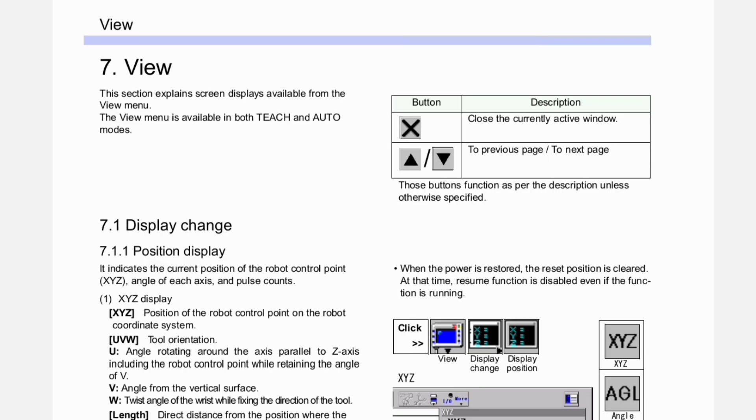Today we discuss view. This section explains screen displays available from the view menu. The view menu is available in both teach and auto modes. Here you can see a table of buttons. This cross button is for closing the currently active window, and the arrow buttons go to the previous page and to the next page. Those buttons function as per the description unless otherwise specified.

Display change. First is position display. It indicates the current position of the robot control point XYZ, angle of each axis and pulse counts. First, XYZ display: XYZ position of the robot control point on the robot coordinate system.

UVW tool orientation: U, angle rotating around the axis parallel to Z axis including the robot control point while retaining the angle; V, angle from the vertical surface; W, twist angle of the wrist while fixing the direction of the tool. Length: direct distance from the position where the position reset was applied.

Relative icon. When the icon lamp is on, the XYZ UVW display uses the position where the position reset was executed as the origin point, while when the icon lamp is off, the XYZ UVW display uses the absolute position of the robot coordinate as the origin point. RST reset icon: click the icon to reset position data. The tool end point is regarded as the origin point.

Second, angle display: angle of each axis RT, UA, FA, RW, BW and TW. Third, pulse display: encoder pulse of each axis RT, UA, FA, RW, BW and TW.

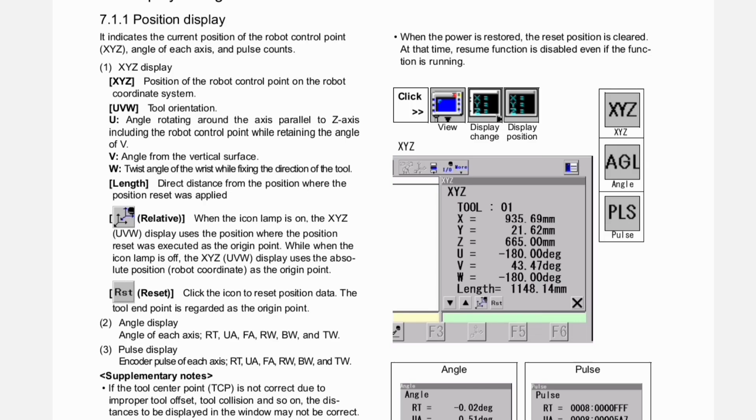Next is supplementary notes. If the tool center point TCP is not correct due to improper tool offset, tool collision and so on, the distances to be displayed in the window may not be correct. When the relative icon is off, the display indicates distances from the origin point of the robot coordinate to the tool center point TCP. When the relative icon is on, the displays for the external axis and slave robot are relative display.

If the position data are indicated on more than one page, the reset operation resets data on all pages, except in a multi-cooperative robot control system: if there is a slave robot whose line is not connected at the time of position reset, the coordinate of the slave robot won't be reset.

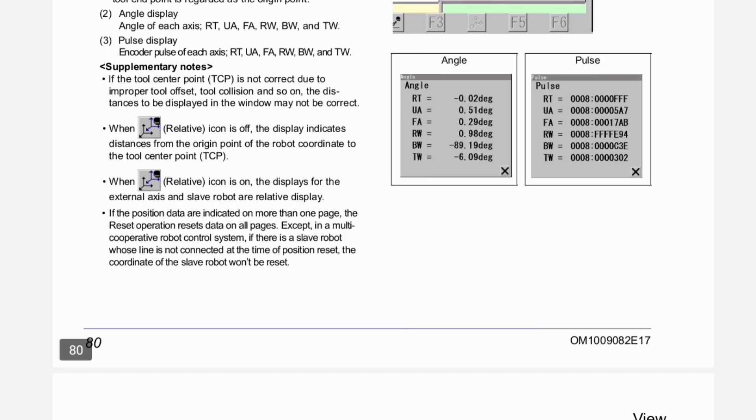All these icons you can see in this image. Here you can see XYZ, AGL angle, PLS pulse and how to view this data. Click view, display change, display position.

Here XYZ, you can also see XYZ tool 01: X 935.69 mm, Y is equal to 21.62 mm, Z is equal to 665.00 mm, U minus 180 degree, V 43.47 degree, W minus 180 degree, length 1148.14 mm. Here you can see angle and pulse.

RT is equal to minus 0.02 degree, UA 0.51 degree, FA 0.29 degree, RW is equal to 0.98 degree, BW minus 89.19 degree, TW is equal to minus 6.09 degree. Pulse: RT is equal to 0008, ratio

0000FFF, UA is equal to 0008, ratio 00005A7, FA is equal to 0008, ratio 00017AB, RW 0008, ratio FFFFE94, BW 0008, ratio 0000C3E, TW 0008, ratio 0000302.

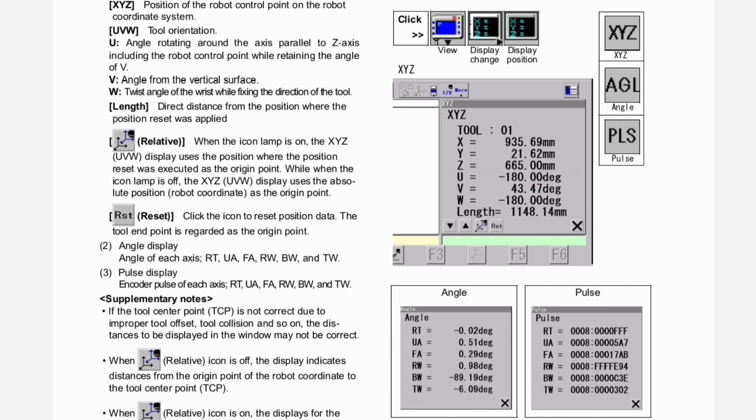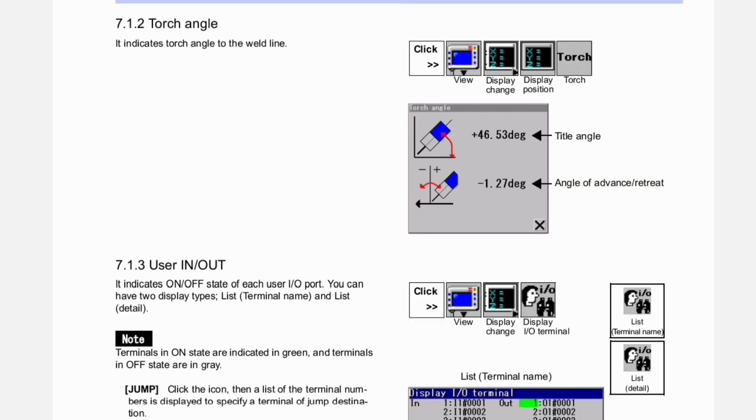Next is torch angle. It indicates torch angle to the weld line. Here you can see the torch angle procedure in this image. Click view, display change, display position torch. Here you can see tilt angle plus 46.53 degree and angle of advance/retreat minus 1.27 degree.

Next is user in/out. It indicates on/off state of each user input output port. You can have two display types, list terminal name and list detail.

Note, terminals in on state are indicated in green and terminals in off state are in gray. Jump: click the icon, then a list of the terminal numbers is displayed to specify a terminal of jump destination. Output control: click the icon, then a dialog box to edit on/off state of output terminals is displayed. Edit the terminals if any. RST: click the icon to reset the output state.

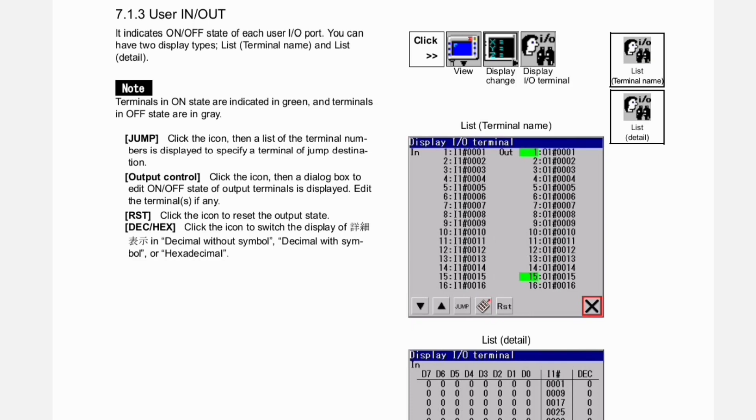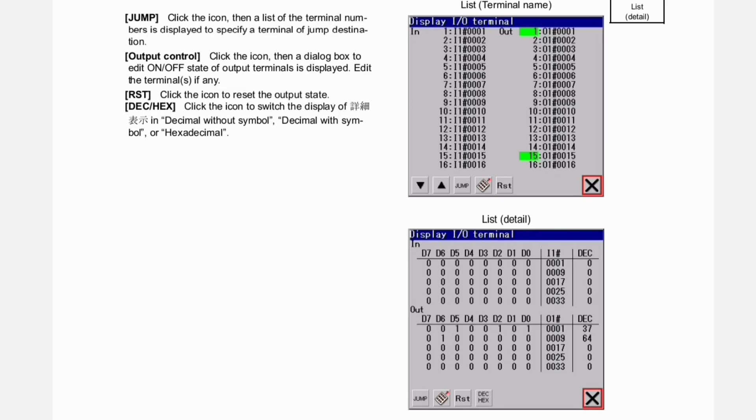DEC/HEX: click the icon to switch the display between decimal without symbol, decimal with symbol or hexadecimal. You can see the terminal names list in this image. Display input terminal, display input output terminal. Just like this, you can see the terminal name. Now next is

status input output. It indicates on/off state of status input output ports. Note, terminals in on state are indicated in green and terminals in off state are in gray. Click View, Display Change, Status In/Out, Status Input, Status Output.

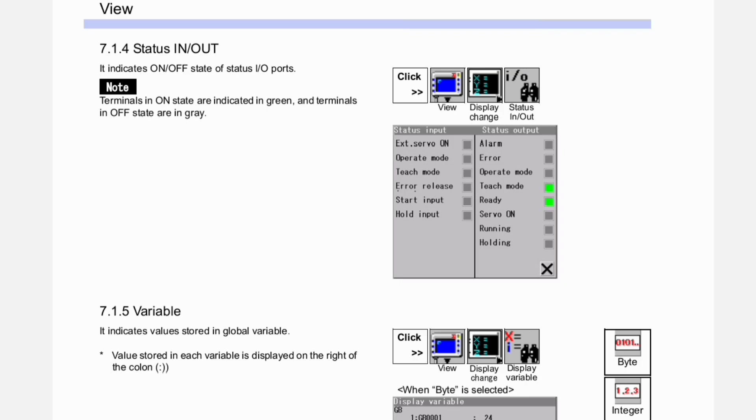Here you can see in status input: ext servo on, operate mode, teach mode, error release, start input, hold input, and in status output: alarm, error, operate mode, teach mode, ready, servo on, running, holding.

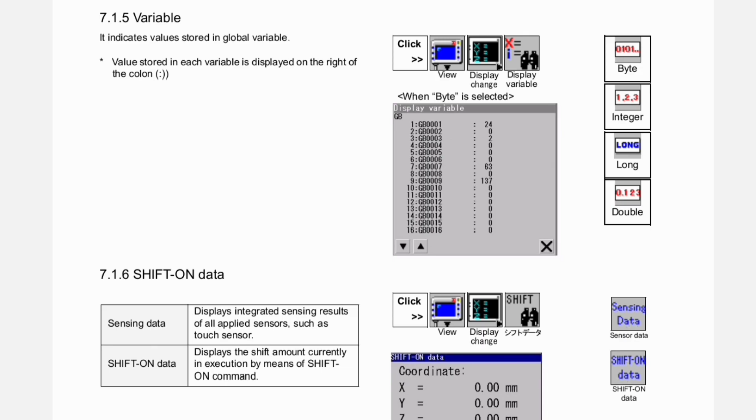Now next is variable. It indicates values stored in global variables. The value stored in each variable is displayed on the right of the colon. You can see these variables in this image. View, Display Change, Variable: 0101 byte, 123 integer, long, 0.123 double. When byte is selected, display variables are available like this.

Now next is shift on data. Sensing data displays integrated sensing results of all applied sensors such as touch sensor. Shift on data displays the shift amount currently in execution by means of the shift on command. Click View, Display Change, Shift.

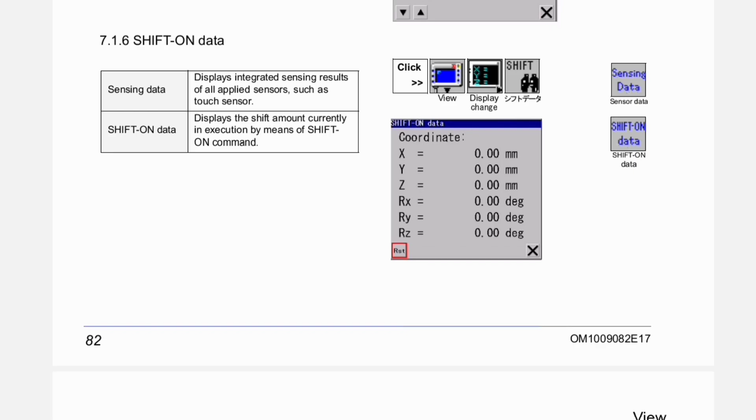Sensing data, sensor data, shift on data coordinate: X is equal to 0.0 mm, Y is equal to 0.00 mm, Z is equal to 0.00 mm, RX is equal to 0.00 degree, RY is equal to 0.00 degree, RZ is equal to 0.00 degree. Reset. Now next is accumulated time.

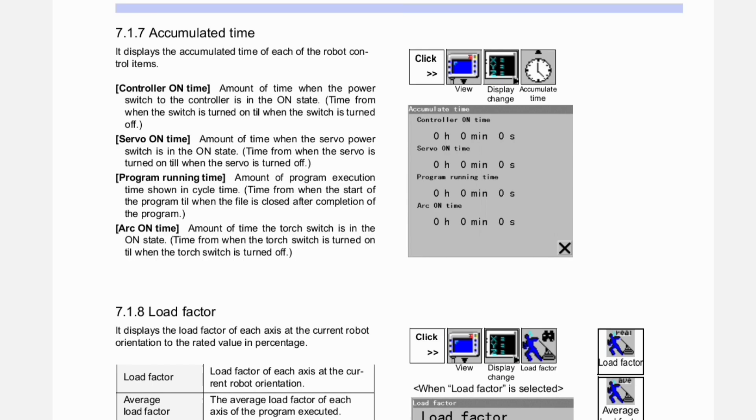It displays the accumulated time of each of the robot control items. Controller on time: amount of time when the power switch to the controller is in the on state, time from when the switch is turned on till when the switch is turned off. Servo on time: amount of time when the servo power switch is in the on state, time from when the servo is turned on till when the servo is turned off.

Program running time: amount of program execution time shown in cycle time, time from the start of the program till when the file is closed after completion of the program. Arc on time: amount of time the torch switch is in the on state, time from when the torch switch is turned on till when the torch switch is turned off.

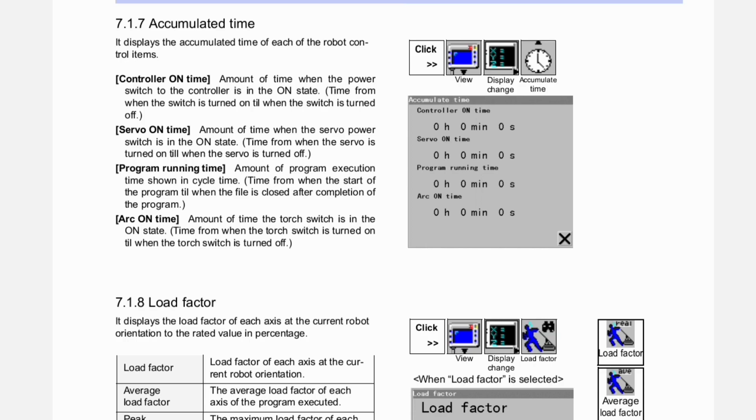Now next is load factor. It displays the load factor of each axis at the current robot orientation to the rated value in percentage. Load factor: load factor of each axis at the current robot orientation. Average load factor: the average load factor of each axis of the program executed. Peak load factor: the maximum load factor of each axis of the program executed.

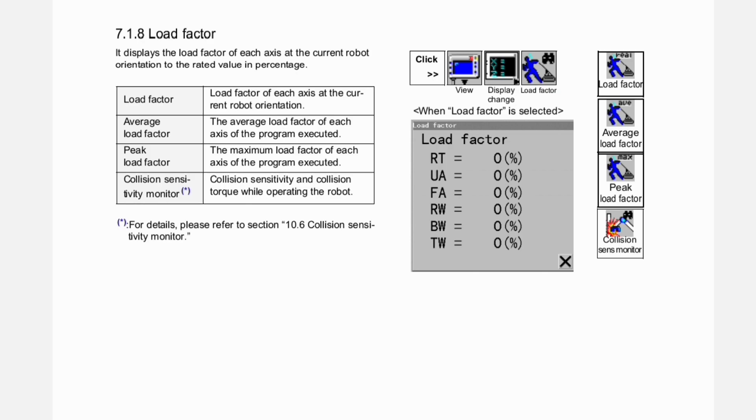Collision sensitivity monitor: collision sensitivity and collision torque while operating the robot. For details, please refer to section 10.6, collision sensitivity monitor. Here you can see load factor in this image. We have display change: load factor, average load factor, peak load factor, collision sensitivity monitor. Load factor: RT 0%, UA 0%, FA 0%, RW 0%, BW 0%, TW 0%.

So friends, here we end this part of our Panasonic robot training. Further information we will discuss in our next video.